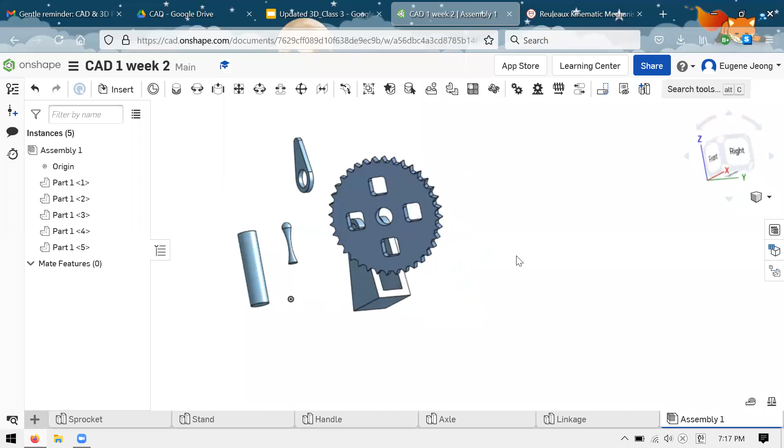First thing we do, same as we did two weeks ago when we first demonstrated assemblies, you'll observe that all of these parts are free to move. So I can click them and drag them. They're not constrained to any part of the assembly, right? It's like I just dumped a bag full of parts onto the ground.

The first thing I want to do is, since the assembly has an origin point, I want to make sure my full assembly is sensibly located with respect to this origin. That's just because maybe I'll use this assembly somewhere else, like in a subassembly or as a subassembly for another assembly. When I import that, this is kind of the center of the assembly. And likewise, when I import the file somewhere, depending on the file type, it might consider this to be the 0,0,0 point, and I don't want that to be over here while my entire model is somewhere else.

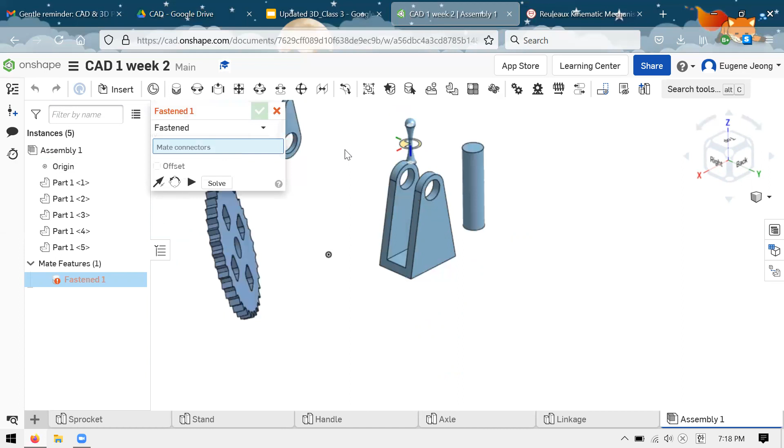So the first thing we want to do is fix the stand. Logically, it kind of makes sense for the stand to be fixed in the context of what this thing is. If you'll remember, we have our fasten mate for that, so see if you can do that the same way we did before: just take a corner of the stand and fasten it to the origin.

And you'll get another chance to work with our mate connectors. So something like that - you'll see there's my first mate. And in the tree on the left, my list of all my mates, you'll see that I have this fastened here.

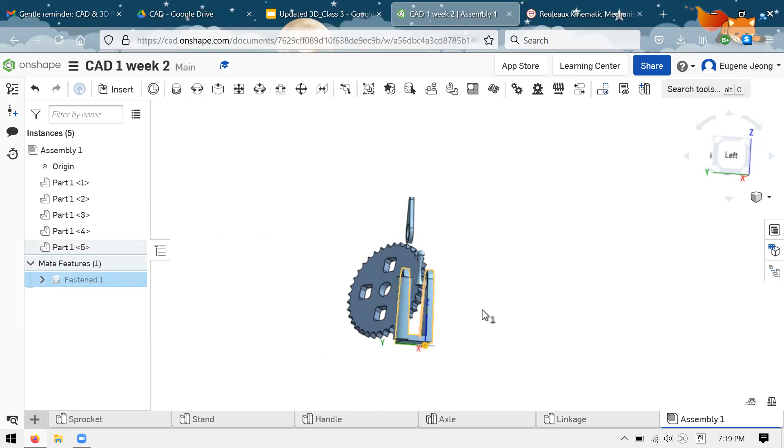I see a couple more people join since I started talking. I didn't really notice when you joined, but all we did so far is open up our assembly that we left off with last week and made our first move, which is to fasten the base so that it stays still.

As we go through this assembly, this is going to be our first sort of complicated assembly where we're going to have different types of mates. We're going to have a lot more mates than we did before when we were just fastening the bricks on top of each other.

In general, when you're working on a project, it's good practice to name your mates, just because, even more so than parts and features, it gets really confusing what mates are - like stand to ground.

If you didn't know that, you can actually name all the parts - everything in the feature tree, even in here, you're able to name. Especially when you work on group projects and are all working with the same CAD document, it's a good idea to name things in your feature tree, but don't worry too much about that if it takes too much time. It's just a point that I like to make.

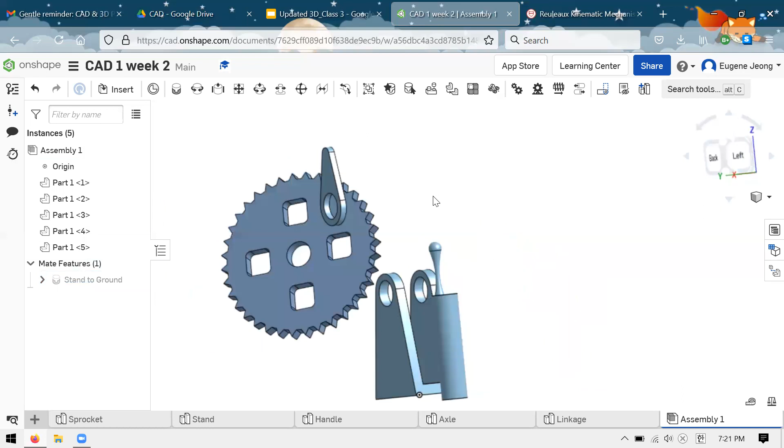So while I'm rambling, hopefully you caught up with that whenever you joined.

Next thing we want to do is just like assembling this if we had the parts with us in real life. Let's say the next thing I want to do is attach this axle to the sprocket. So what I do is put it into the hole - I want it to be symmetrical so that the axle is centered on the sprocket, and realistically I want them to be joined together.

As if I were taking glue and applying the glue to the axle just so that it would rotate with the sprocket. In real life I probably wouldn't use glue because that's not a good way to transfer torque, but you can see in the demonstration model there's a keyway, which I brought up last week. We're just mimicking the function of that keyway, which is to lock things rotationally. Since I'm using the word lock and glue to suggest that, we're going to use a fasten mate.

This is a bit different from what we've done before, since we want this to be symmetrical instead of a point-to-point kind of mate. You'll notice Onshape has these default mate connectors. When I hover over my shaft, you'll see by default there are 3 mate connectors: one on top, one on the bottom, and one in the middle. That's great, I want one in the middle because I want this to be symmetric.

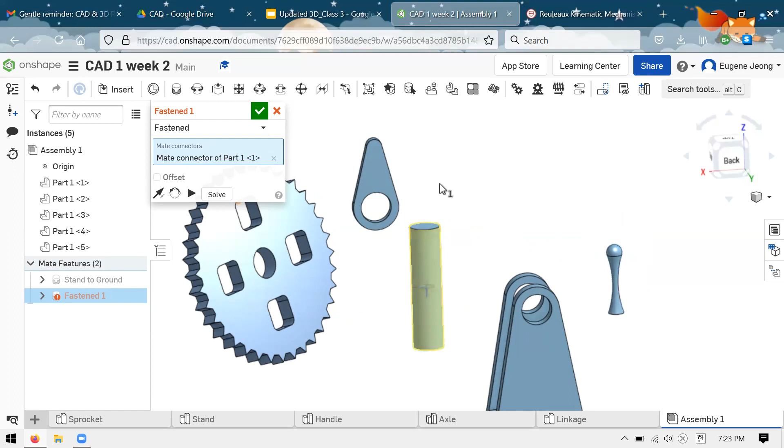That's what you would do, but in my case the middle is good. So there's my first mate connector. As you know, for the fasten you need 2 mate connectors. The second one is in this sprocket, and I want it to be in the middle as well, so this thing ends up symmetric.

So what I'll do is align my camera so I can look into this bore in the sprocket, this hole. If you look really closely, this one also has 3 mate connectors: one on the front side, one on the opposing back side, and one in the middle. It might be hard to tell three-dimensionally, but as I move my mouse here, this mate connector is located on the plane that bisects the sprocket.

So I click on that. Onshape solves it, and you'll see that now it moves to where I want it to be. So that's a fastening complete. You can see when I move one, the other one moves with it—they're functionally just bonded together now.

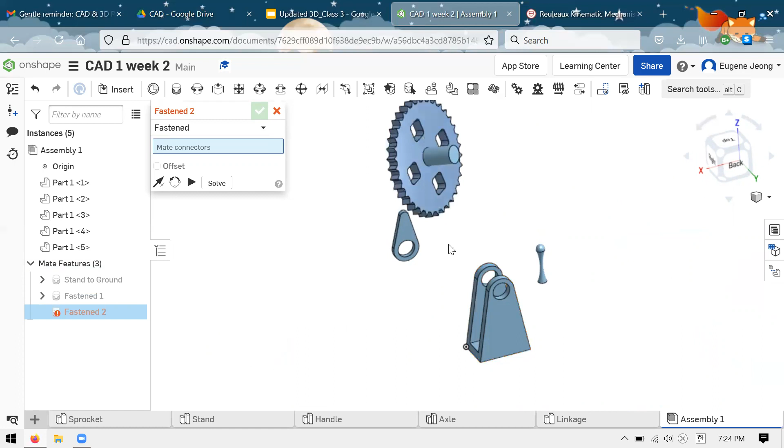If you had any problem with that, ask a question. If not, I'll assume everyone's good.

So now there's kind of 2 ways we could go. We can either put this thing that we just made into the stand, or we could also put the handle on. Maybe for me, I'd like to put this on the stand—that seems pretty interesting.

So how do we want these things to behave with respect to each other? Well, we don't exactly want to fasten them anymore, because if we did that it would be kind of like we're gluing them together. There would be no motion possible if we fasten them, and that's not really the intent. That's not the design intent, where we want that handle to be able to rotate the sprocket. So we're going to have to use a different kind of mate.

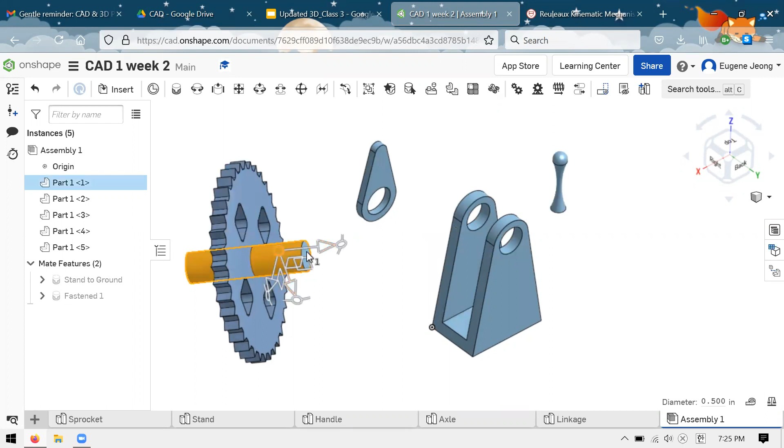I see you have your hand raised, you have a question? I was just thinking about it—which one is the axle again? This is the axle, I've also called it the shaft. Which one's the linkage then? That'd be this one. Doesn't the linkage have 2 holes inside, or does it have 1?

It doesn't really matter. As I've said a couple times, this isn't really realistic. This isn't like the way you would make this if you were woodworking or metalworking, but just for the purposes of our CAD it'll work either way. If you had no holes it would still work, just because we have our mates, which are these ideal geometric relationships. So it doesn't really matter—it's up to you whether or not you have the holes. Should work whether you have 2, 1, or none.

All right, so next thing we want to do, I guess next thing I will introduce is the second mate. You'll see that it is actually the second one in the toolbar.

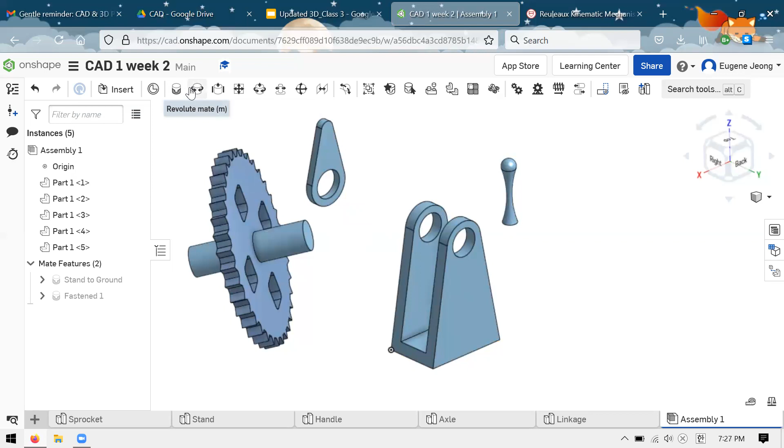We've used fasten, now it's revolute. Let's see what it does. We click on it, brings up the same tool, and you'll see it still asks for mate connectors. It's pretty much the same thing that we've done, just that it will end up behaving a bit differently.

So what's my intent here? I kind of want to put this axle, the shaft, inside of these 2 holes, the bearings. And I want it to be symmetric again. So for my first mate connector, I want it to be kind of in the same place that I just put it.

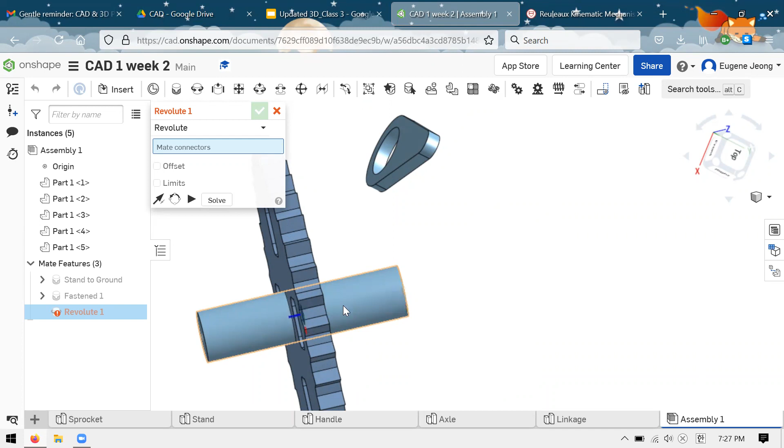It'll be kind of hard to see now that the sprocket's in the way, but what you can do is hover your mouse over this piece. If you just move your mouse a bit, you'll see the mate connector moves as you come closer to one or the other. So you should just be able to select one like that. You can see that's where my mate connector is right there.

And for the second one, you can imagine where I would want my mate connector to be is right in the middle here, between this hole and this hole. But you can see Onshape doesn't like intuit that, right? It doesn't know what I want.

So what I can do is create a mate connector using the mate connector tool. There's a few ways I can approach it. I'll show you one of them.

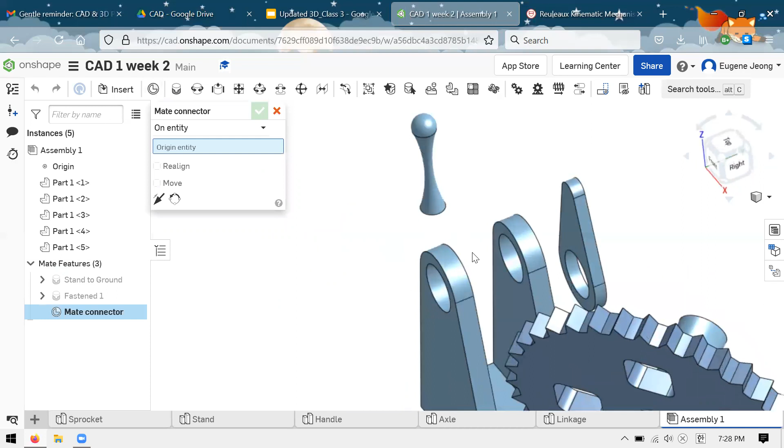So how are we going to do this? We have our mate connector tool. That's the one right over here. And it allows you to just create a mate connector.

So the way this works, it's kind of like selecting a mate connector for a mate, but you see if I click kind of generally where I want it to be, you can see where the mate connector is.

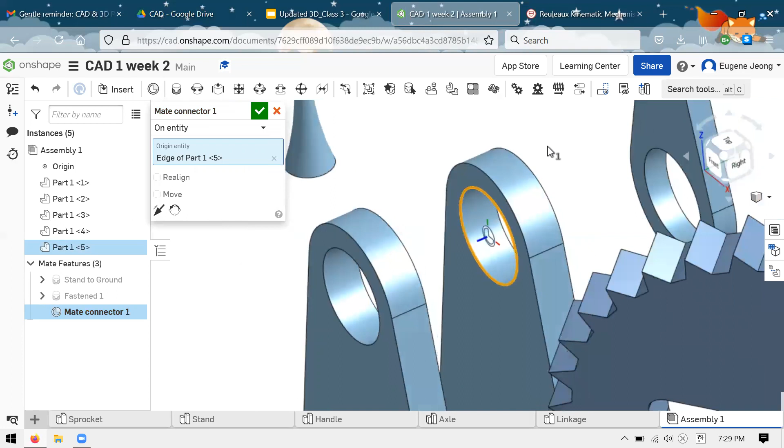And so you can see this where the mate connector is. This is almost where I want it, but not quite. It's on the right axis in terms of the cylinder, but it's not in the right location along that axis. And what I can do is just tell it to move.

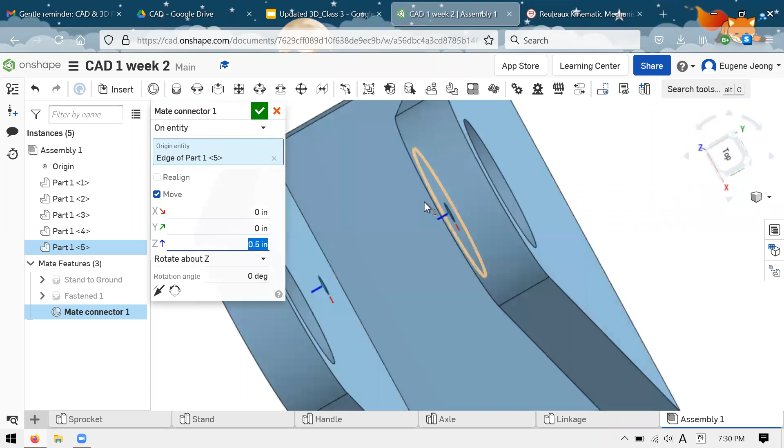In this case, perhaps I would need to know the distance between these two. I think from memory, it might have been like an inch or something. But you can see what happens. I guess it was not an inch, but must have been 3/8 of an inch.

So you can see that's one way I can do this, right? I created my mate connector. Don't worry if you missed that, I'll be coming back to it, but I have this mate connector now that I can use for another mate, where I can now select this as one of my mate connectors.

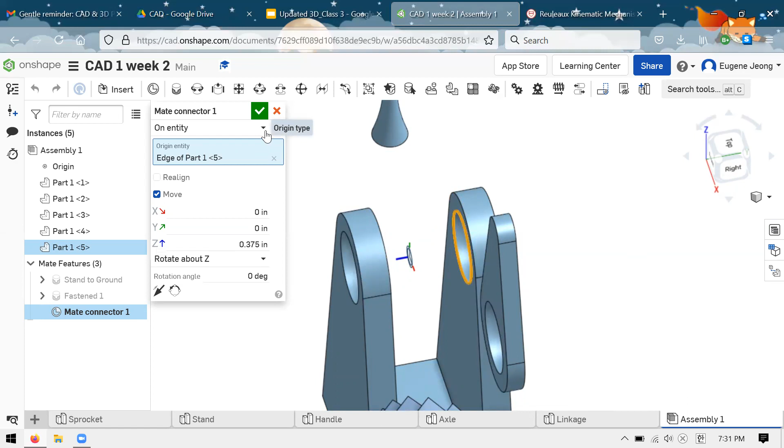You might think, oh, what you just did, that wasn't very robust, right? If I change the stand, it's not going to change together. And you're right. If I update the size of my stand, the mate connector is still going to stay like 3/8 of an inch away from this face, which is not great.

And so you can see now I have another option. We have on entity by default, but if you click this little triangle, you have an option for between entities. Hopefully if this tool works the way I think it does, as always, we're doing this live. I select 2 faces.

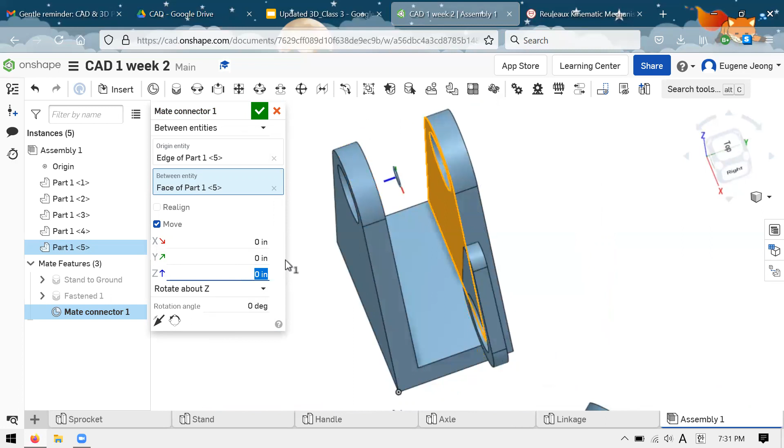Okay, let's try that again. And as you can see, this tool perhaps does not work the way that I expect it to work. And that's fine. That's how we learn things in CAD and in life.

So what we'll do is go back to the way that we had it before. I'll select that. I'll change back from between entities to on entities. If you're really curious about what between entities does, I'd recommend you look it up. Onshape has a pretty good documentation.

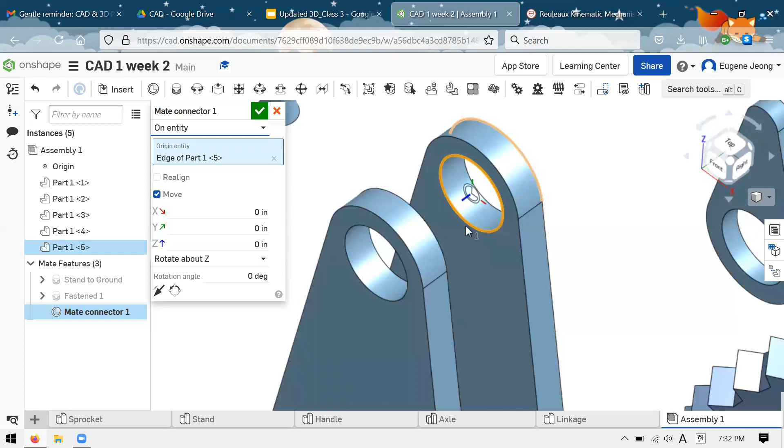Right, I'll pause for a moment there. That was kind of a bit of rambling, but hopefully you're able to follow that. I expect you might have some questions about creating this mate connector, but feel free to ask.

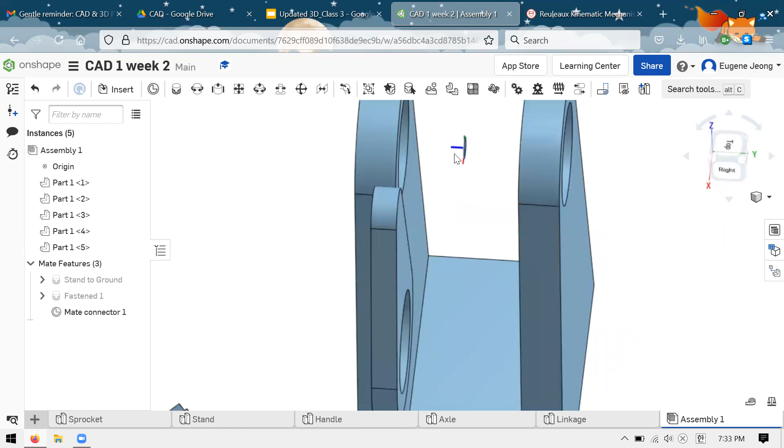All right, great, glad my explanation was clear. So that's how you create a mate connector. If you really want it to be robust, you can use what's called variables, which we cover in a later CAD class. There are ways to make it robust even if the tools don't work exactly the way you thought.

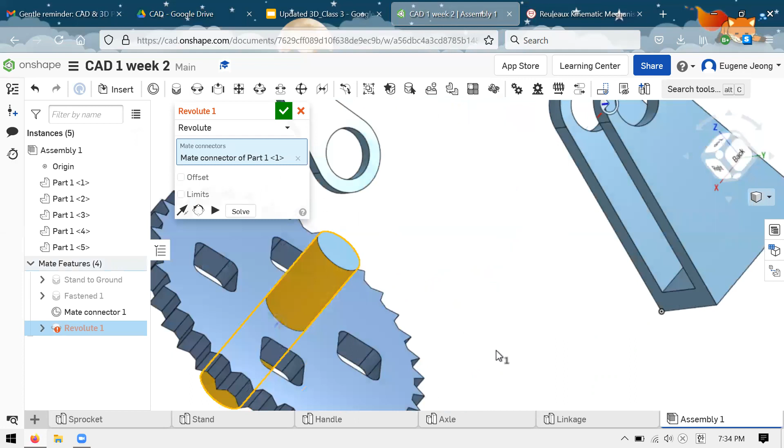So back to where we were trying to use the Revolute mate. Let's go back to that, open it up, tools active, windows open. Here it is. For my first mate connector, I want to hover over the axle and bring the mate connector down to the center. It can be a bit finicky, but with practice you should be able to get it.

The second one, just select the mate connector that we just added manually. If all goes well, it'll solve, or it might not solve, but it'll move over to where it should be. You'll notice the sprocket didn't come with it—that's just because Onshape hasn't solved it yet. It hasn't gone through every interaction to figure out where everything should render; it just moved the most immediate entities involved. If I click solve here, Onshape goes back and checks all the interactions. It sees the sprocket should be fastened to the shaft, so it moves the sprocket too.

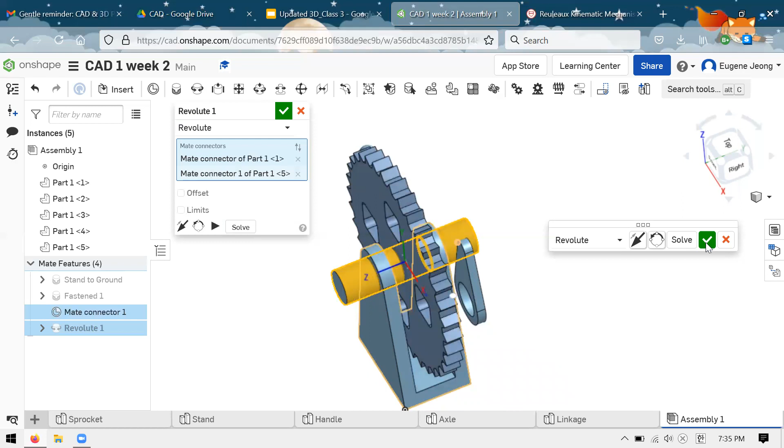So now we're good, right? Looks pretty good to me. I'll click the check mark. And that seems to be what I wanted it to do. So that step is finished. It's probably one of the more challenging steps in this whole process, so if you have any problems with that, speak up.

You can also hide the mate connector once I'm done with it, just like I could for sketches and parts. Is anyone not able to get to this step?

Wait, when I moved it, it only moved the axle—it didn't move the sprocket. If you're still in the window, like if you haven't accepted the mate yet, you might see a button that says solve. If so, click that button and hopefully it'll update. Even if you don't click solve, if you click the green check mark to finish the mate, it'll probably snap into place. And if you've accepted the mate and it looks like what I have now, and the sprocket doesn't move, that's probably an issue with your fastened mate.

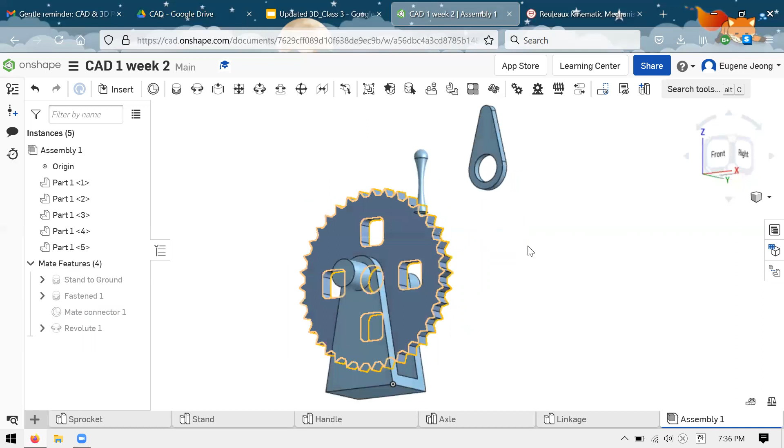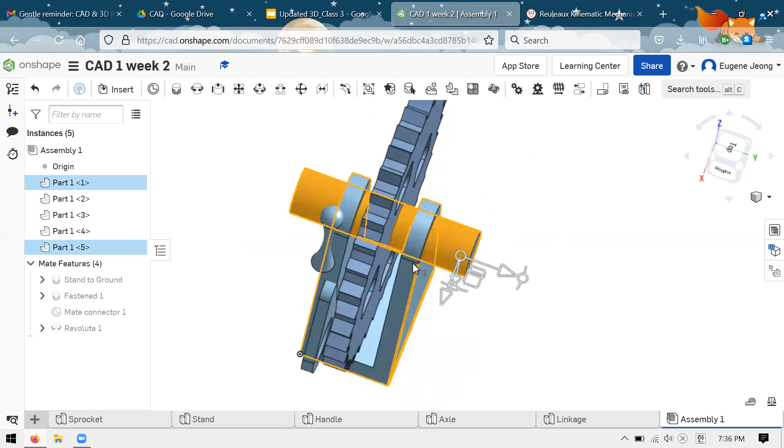Excuse me, yes, but how did you manage that—the tube in between, whatever that thing is in the stand? With the axle—how did you get the tube to go between these two, this and this? Yeah.

Unfortunately there's not a rollback bar, so I can't just go back. But the mate that's involved there is the Revolute mate we just did. I'll show that again since it seems more than one person is on that step. This is the new mate we're introducing—it's called Revolute, the second one in the list right after Fasten. And so we're able to create the mate connector—this thing right here.

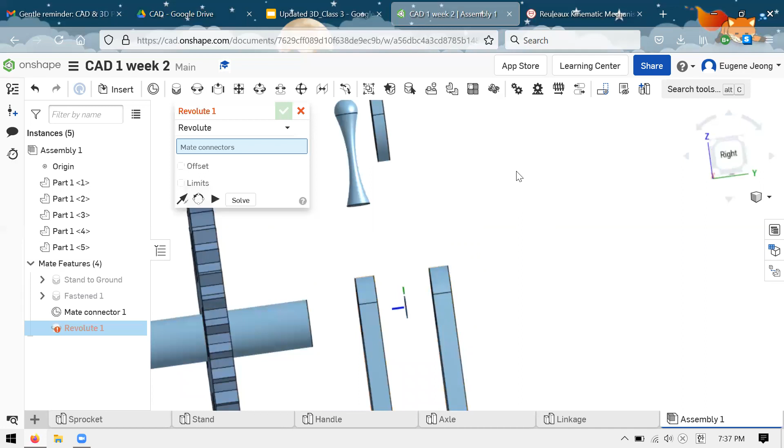I'll take your silence as agreement. I really can't talk that much because my throat hurts a little. I didn't understand what you said. I can't talk much because my throat hurts whenever I talk. Oh, that sucks. Okay.

Let's move on. I'm not sure what the situation is, but if you have the mate connector for the Revolute—yeah, I accidentally deleted it, so I'm just watching. Sorry, I'm not making out all of it. No, I'm just watching because I forgot where I put the slide, so I can't find it.

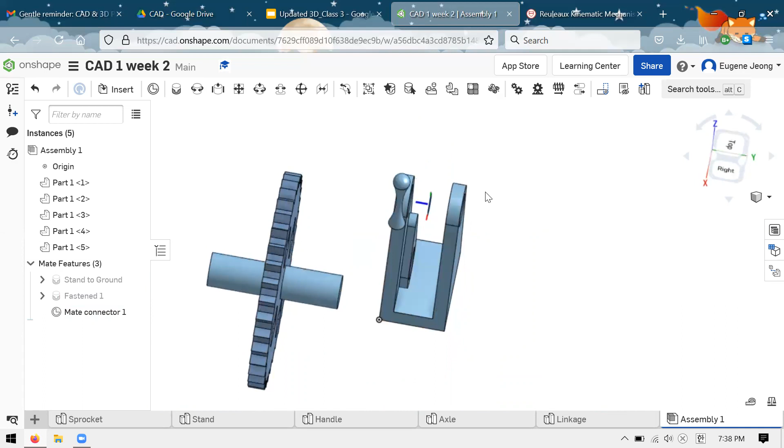In terms of the slides, I don't think they're posted on the classroom, but I take it you're just watching the class, which is fine, I guess. I think the student on the call is doing that too, so it's up to you. But if you have any questions, feel free to keep asking.

For now, I'll just slowly demonstrate the Revolute again. I select the first mate connector in the center of the axle here, and for the second one, I just select this mate connector that I created manually.

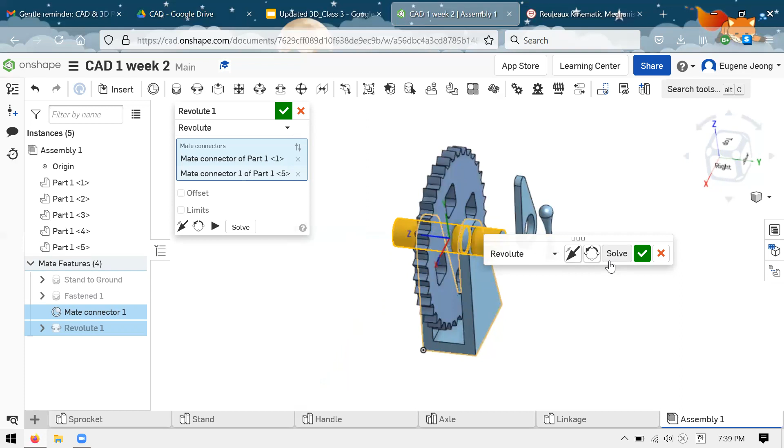One thing you might observe is when you first click on a mate, only the axle moves. This is just a visual thing. Onshape doesn't take the time to check every single mate and update it visually whenever you first create the mate. If you want to see what happens, you can click solve and Onshape will update everything. But even if you don't click solve, if you click the green check mark, it will update.

If not, I hope they will ask again. You'll see what the revolute does, kind of as its name suggests. It allows revolution, rotation. I don't know if you can see it well through Zoom, but I am able to spin the sprocket inside of the stand just by clicking and dragging.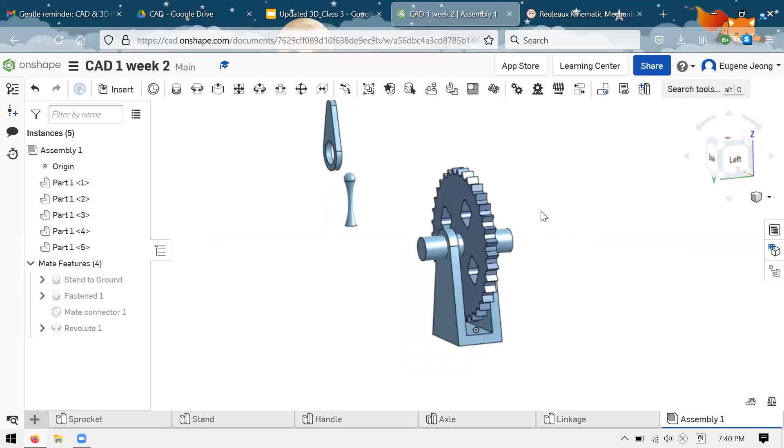Another way you can visualize what your mates are doing is using an animation. If you right click on a mate in this tree, you'll see one of the options, third from the bottom, is animate. This comes up with a whole bunch of options. The main thing in this case is I wanted to loop because it's circular, and the number of steps just determines how fast it goes.

So if I put in a number like that, you can see, hopefully with a slower rate, you can actually see it through Zoom.

If you're asking about the animation, I'm not sure, based on what you said of your situation, if you're on Onshape. I'm on Onshape. I'm just curious, how did you rotate this?

The rotation is enabled by the revolute mate. Up till now we've been using the fasten mate, which I've talked about in terms of gluing things together, fastening them, locking them in place. The revolute mate is our second type of mate, and it's different in that it allows 1 degree of freedom. All of these mates determine how our different parts are located with respect to each other and how they're allowed to move relative to each other. The fasten mate tells you the location of 2 parts with respect to each other, and it just locks those in place.

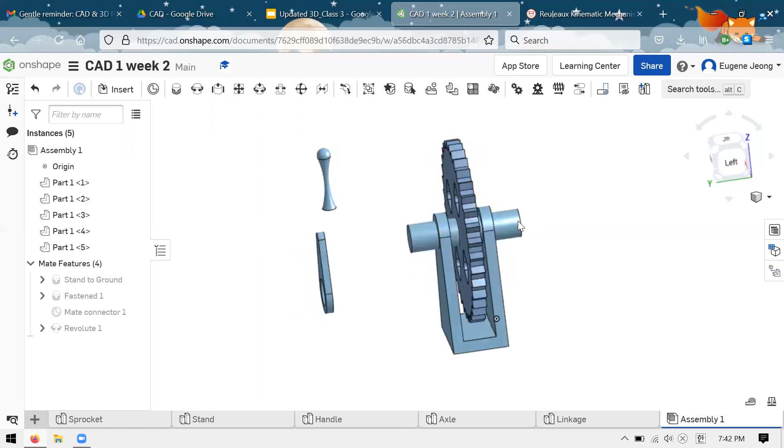Well, revolute also determines the motion of the parts relative to each other. So when I revolute this axle to the stand, I'm telling it that in the direction of my mate connector, which is along this y-axis in the full assembly's context, it has a degree of freedom there. So it's allowed to move, which means it can rotate. That's what the revolute mate does. You can see in the icon it sort of tries to explain what it does by having these arrows. For a cylindrical component, the revolute mate locks it into a position, but it doesn't fix its angle, so it can still freely rotate. This is very useful for things like modeling wheels, modeling gears, anything that spins.

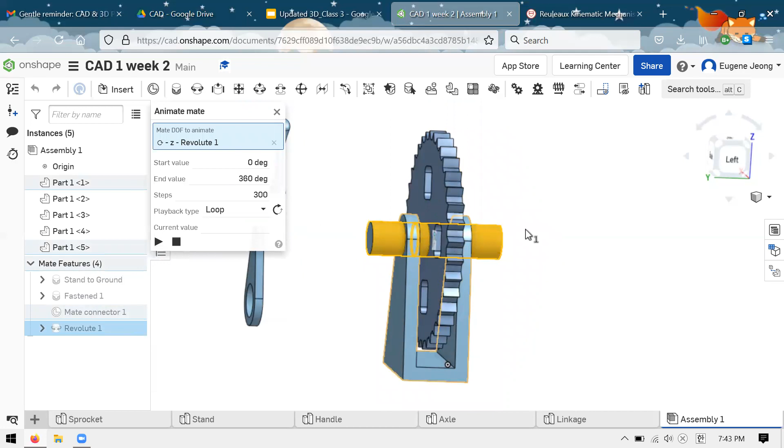Now specifically for the animation, the way I did that was right clicking, and if I click animate in that window, it brings up a bunch of options. All I did was change that to loop. If I play it, all it does is show every single position that this mate allows. The mate allows rotation, which is 360 degrees, and it just goes through every position that this mate allows with its 1 degree of freedom. You can even see the current value of the mate in degrees right here: 212, 230, 250, 260, and so on.

So to all students, I hope it works. I hope you don't have any problems making the mates, but if you do, just know that mates are often a very finicky part of CAD. They don't always work the way you expect them to. They often break for unexplainable reasons, but all you can do is persevere. So are there any other questions up to this point?

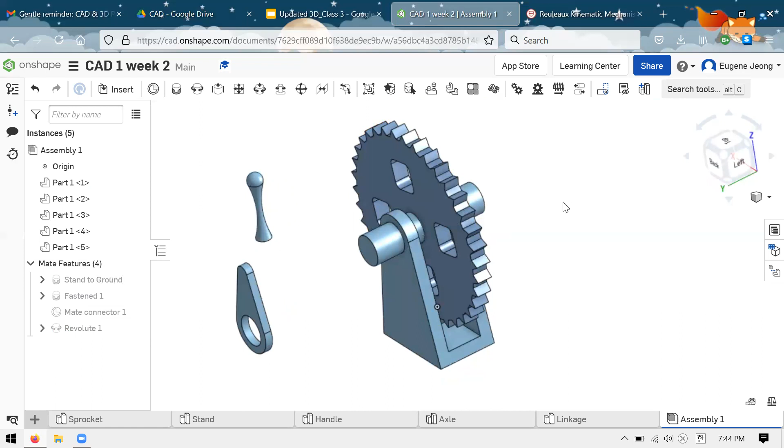So how did you do the animate thing? In the mate tree here, in the list of mates we have, the mate that allows motion right now is revolute. And if I right click on that mate, this window comes up, and towards the bottom here, there's an option called animate. So if you click that...

By default, it'll be on reciprocate, just to show you what that does. It's kind of like a reciprocating motion. It'll complete one full circle, then go backwards, then forwards, then backwards. The way you can speed it up is just reduce the number of steps, so this will make it 3 times faster, just showing fewer steps. It's essentially just a speed up. You can see what the reciprocate does, it just flips back and forth.

There's also single, which will just do it once. In this case, what makes most sense is probably loop, just because we do want it to keep going in the same direction.

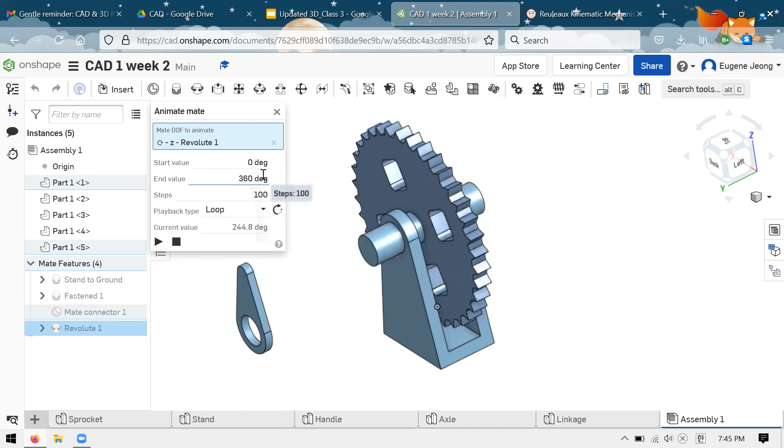So that's that. Animation isn't too important unless you're doing like a concept demonstration. Maybe you're a designer and you want to show off what you have, make some renders. In that case, you'll probably be doing some kind of motion study where you'll be animating multiple mates at the same time.

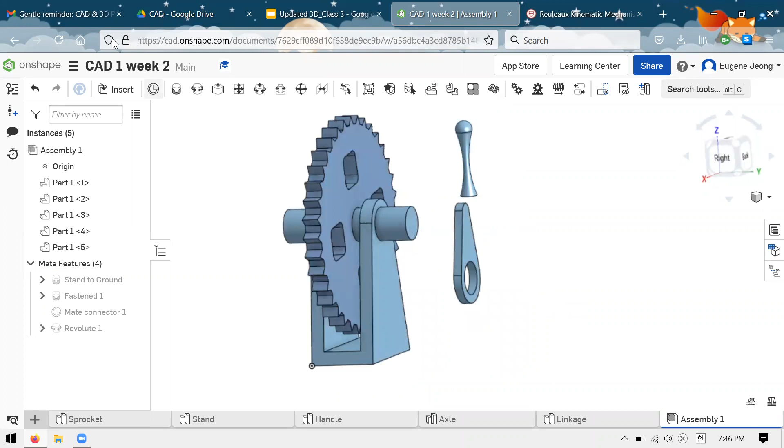So here we are, we're almost done. We just have these 2 parts left that we haven't used. First, we have our linkage here, which, as someone pointed out, it's really up to you how you make this. It could actually just be a rectangle, and that's totally fine, since we know how to use mate connectors now to allow us to do what we need. So let's start off by thinking about how these 2 things should attach.

And this is another place where perhaps in real life we wouldn't design things this way, but since it's CAD, we can kind of get away with it. Since this is a crank handle, we want to make sure the sprocket moves along with the handle. So relative to each other, the handle and the sprocket shouldn't be moving, and that means we want them to be fastened.

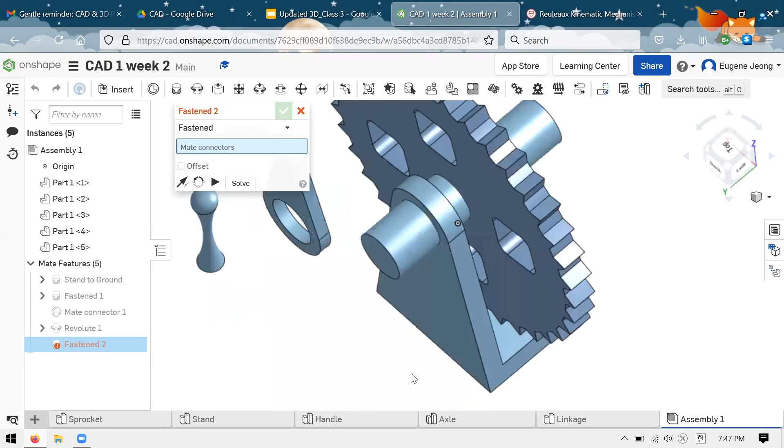So we're doing it again. See if you can figure out how to set the mate connectors up yourself. In this case, you don't need to make a manual one, you can just use the ones that Onshape can intuit. For me, I think I'll just go with the one on the end here, and I'll pick the one on the end here.

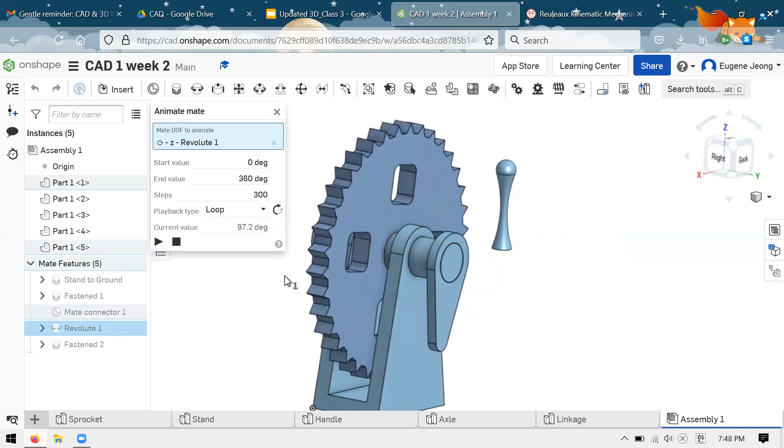What happens is the circles get locked together. Click the check mark, you'll see now they're attached. What you can see is now it behaves the way I want it to, where I can turn the sprocket using the handle. And again, if I animate it... there you go. So I'll wait just a moment for you to make that fastened mate.

See if you can figure out how to do the handle too by yourself. It's pretty much the same concept now. We kind of want to glue the handle to the edge of the linkage, so we're going to use another fasten mate.

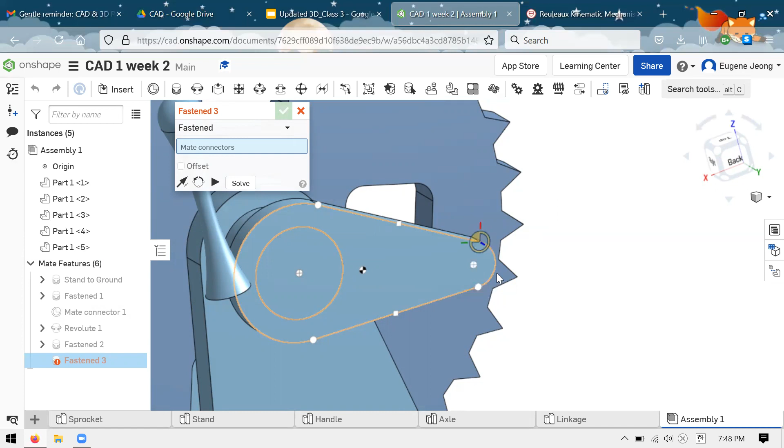And let's see in this case if Onshape is smart enough to guess where my mate connector should be. Spoiler, I guess Onshape can do it. And that's kind of because the way that I created this object, I made sure this is a circular arc. And so whenever there are circular arcs, like there is right here at the end, the center of that arc will be automatically kind of included in the likely mate connector points.

And so that's great for me, that's what I want. I'll select that as my first mate connector. And for the second one, I'll just pick the base of the handle, like so. And that looks good to me. I'll click the green check mark. And with that, I'm done with my assembly. That's all I really needed. That's all I have, the show's pretty much over.

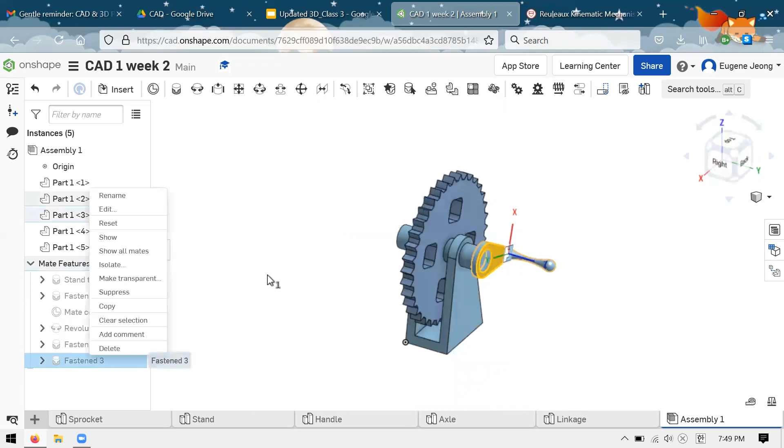I'll wait again just for questions if you have them. You can admire your handiwork. If you want, you can hide the origin and the other things. Wow, wow indeed.

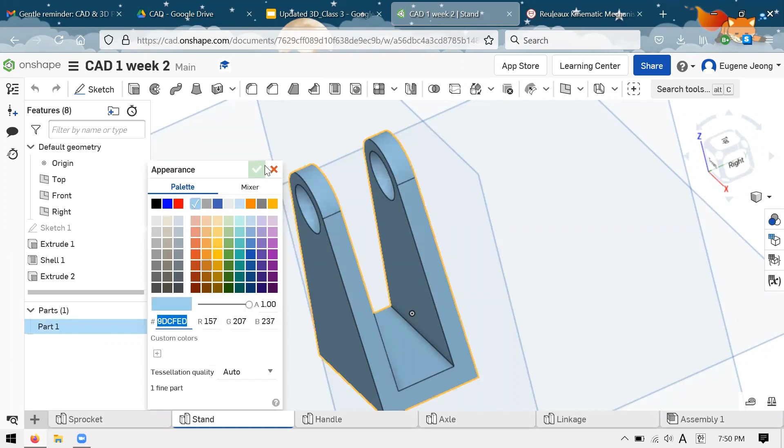If you're an aesthetic person, you can go back and change the colors of your parts too. I don't know, I'm not great with colors, but whatever floats your boat.

The way you change the color, you go back into the part. If you right click on the part here, you'll see the fourth option is edit appearance, and what you can do is just pick a color. It's mostly just for visualization, it doesn't change anything about the model. If I go back into the assembly, you'll see, hopefully it updates. Yeah, there you go, bright and colorful.

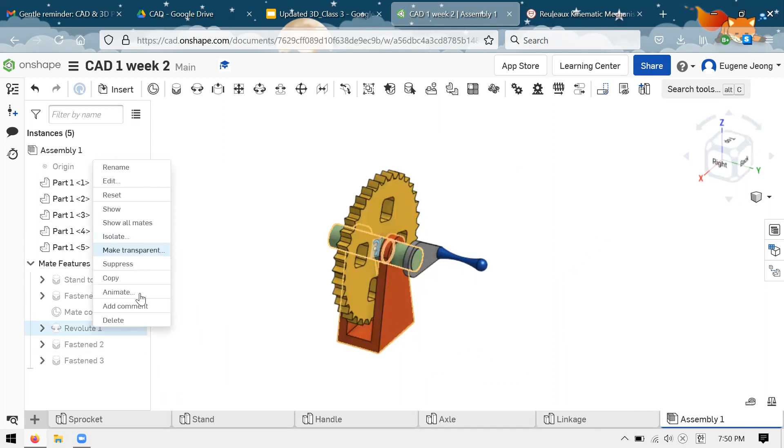So no one's asked me any questions, so I assume you're all at the same place, for those of you who are able to CAD currently, which is pretty good. First learning assembly is pretty challenging, I suppose. So you've made your first steps now.

And where do we go from here? So this whole process took... I see a question actually. Reminds me of McDonald's colors. That was not intentional, but I suppose like the red and yellow, I can see that.

So we've made one thing, and what is there to do but make another thing, right? Of the projects that this class has done in the past, just as a reminder, it's my first time teaching this class.

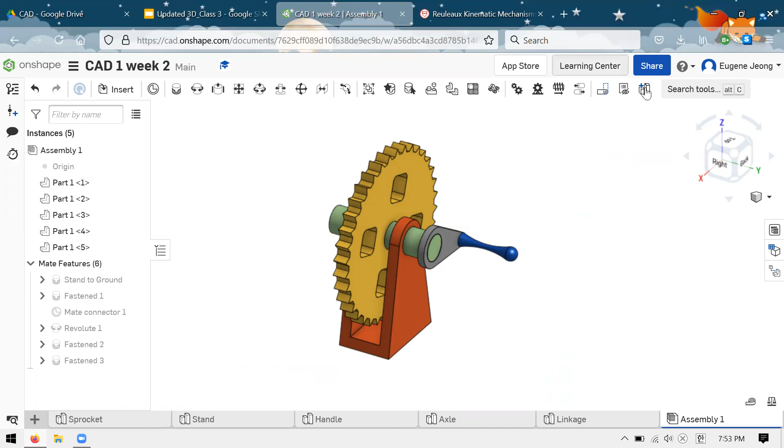So if you're motivated, if you want to learn, sure, go for it on your own time, or maybe on our time if you're very fast at doing the things that we do together.

But the next thing we're going to do is try to make this. So again, I'd recommend making a new document, new assembly, new document. I'll call it the do nothing machine, I suppose. And here we go, fresh start, new part studios, new assemblies.

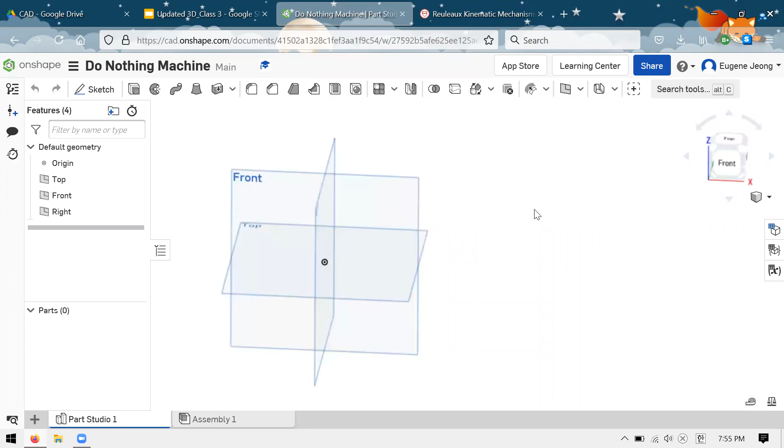I'll go into the same thing that we did last time, talking about what shapes do you see, how are you going to make this thing. But before I do, I just want to show you this website. I'll copy the link for you too. It's kind of a virtual library of Cornell's collection of kinematic machines.

So on your own time, if you're interested in this kind of thing, which I kind of am, you can go through and look at them. A lot of them have videos associated with them, which is cool. So this is kind of like a class of those machines, right? It's a very simple one linkage device.

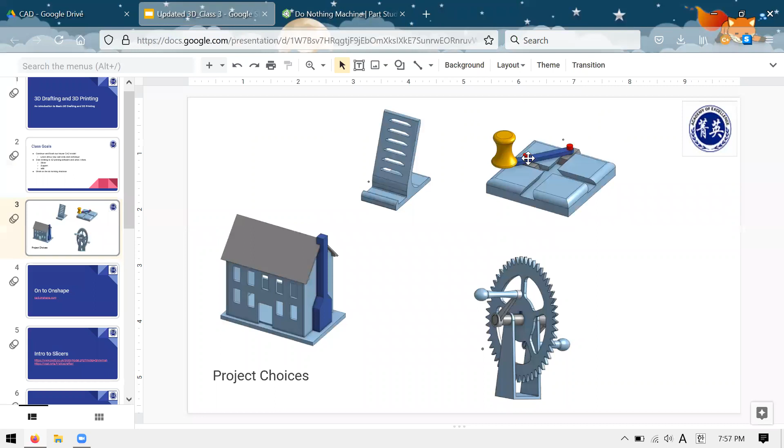So while we're here, I'll open the floor by saying, what shapes do you see? I'll bring it to the front so you can actually see it. There you go. What shapes do you see? Square. Where do you see a square? The base. Base. Sure, I buy it. What else?

Quadrants, so another square is on top. Yeah, okay. And you'll notice the edges aren't really flat or straight, so that might be something interesting. What about some of the other parts? What do we see, maybe in terms of features that you might use in Onshape?

Like the circles for the handle, yeah sure, like the 3-point one. Yeah, like the sketch tool where there's different ways to draw circles. That might come into play.

So like with that arc there too, yeah. And what about this groove? What shape is that? Sort of like a dovetail in woodworking. What's it called? Great question.

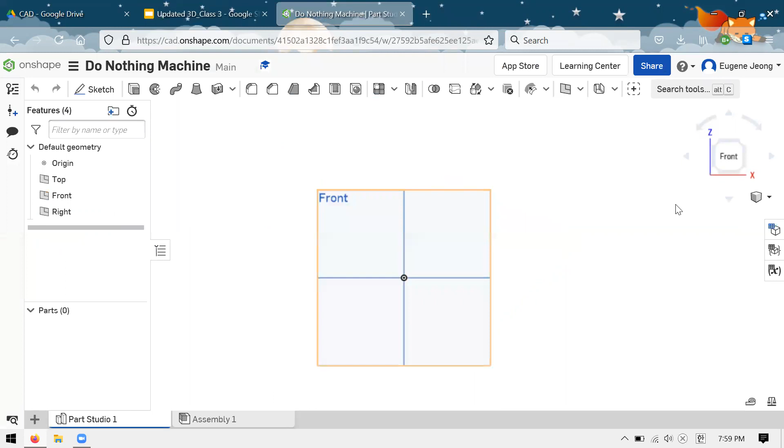What's this whole entire assembly called? Yeah, I don't know if this particular one has a name. It probably does, actually, I'm sure it does. I'll leave it as an exercise for you to find out because I do not have it on the top of my head. I think it's named after somebody, ancient Greeks or something of that nature.

So we'll start off just with our part studios. We identified all the parts we have. So there's a base here, there's these trapezoidal sliders, there's a link and there's a handle. So how many distinct parts? 1, 2, 3, 4.

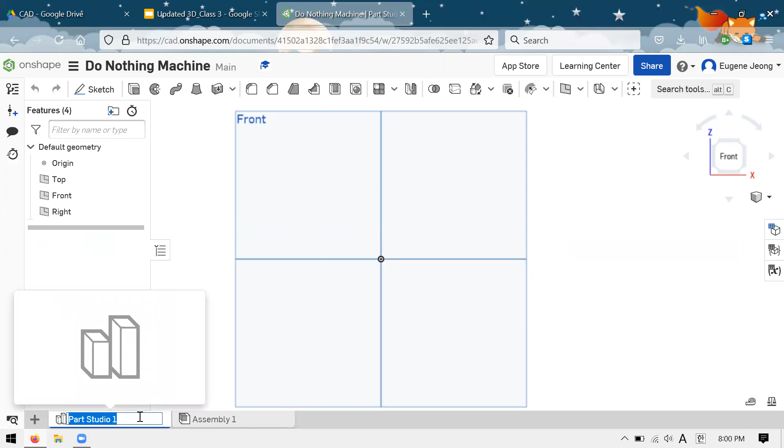So just go ahead and create those. We want a base, we want sliders, we want a linkage. And what was the last one? The handle. And our assembly, which is just there by default, so we'll get to that last.

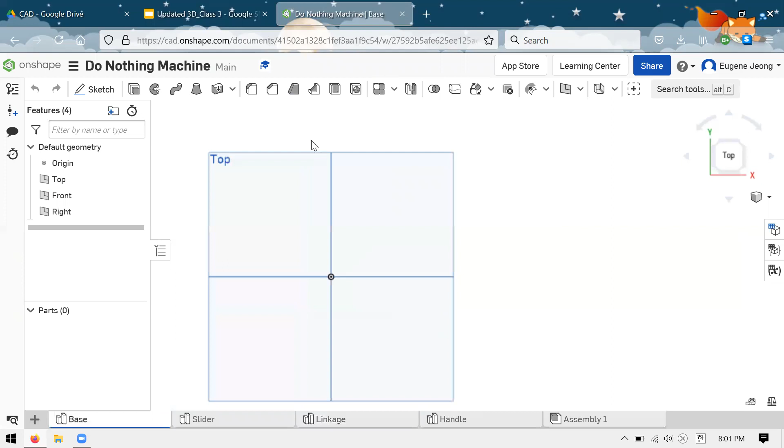So starting off, since we don't have that much time, how many classes do we have? I think this is week 6, so we do have just 2 weeks after this, so I think we'll finish. Shouldn't be too bad, I'll just get it started.

Someone said the base looks like a square, which I agree with. It's symmetric by 90 degrees. So let's start out with that.

We make a square with that corner rectangle tool. I suppose if you're someone who cares a lot about part and assembly origins, you can make the square centered, which in some cases might make more sense, but I'm not too worried about that right now. Next thing, condition for a square is that they have equal sides.

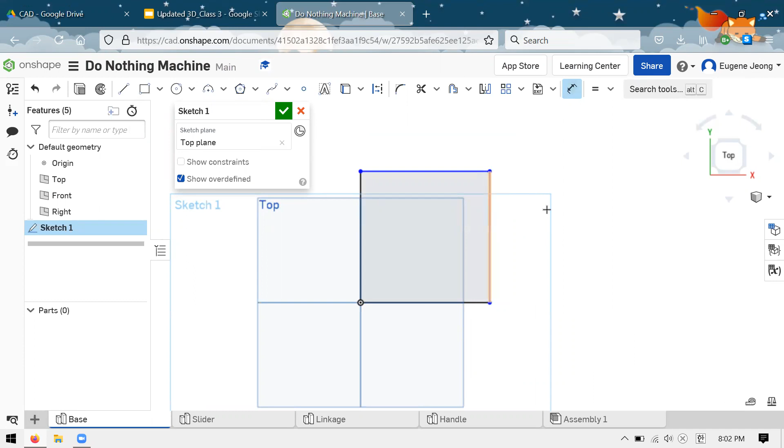So I can do that with a constraint. Last thing, why isn't this fully dimensioned yet? It's because there's no dimensions. So I'll just add one with the dimension tool. And this number will determine the size of this entire object. Let's say 2 inches.

It'll be miniature. So that's a square. The next thing we'll probably do is to extrude the square. It's been a classic move. So we've done most of the work now.

We just need to cut out these grooves, and we need to round out the edges here. So we'll do that. We're gonna have to make a sketch for the grooves, right?

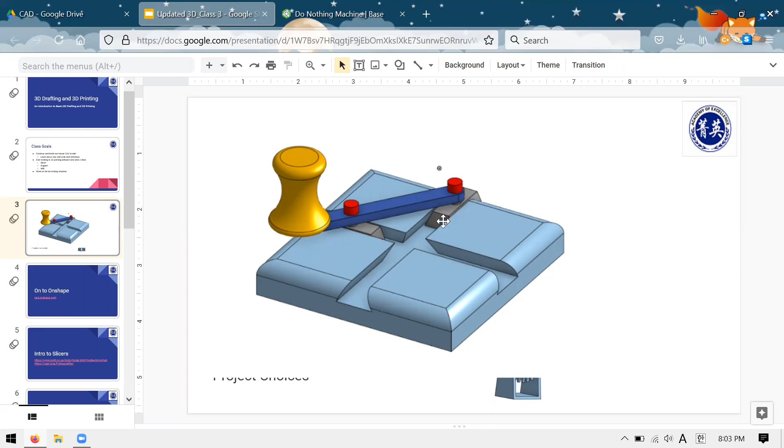And you can imagine the way we might go about doing these grooves, perhaps, is to cut out the shape of the trapezoid that will be sliding along it. So if we look in one of the orthogonal directions, maybe the front.

I can then sketch on the front plane. You can see the outline of my sketch there. And what I'll do is I'll draw the shape that I want, which is a trapezoid. I drew it up in the air, but that's just because I was trying to make a point that I can make a better way.

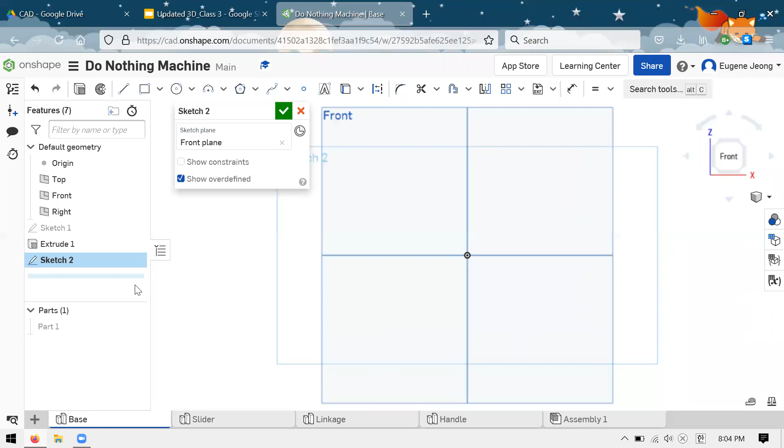So I made the sketch and right now there's nothing in it. If I hide the part that we already extruded, you'll see clearly there's nothing in the sketch, right? But I don't want to make this sketch from scratch. I kind of want to have it be in a logical place with respect to this block that I already have.

And so one way that I can incorporate this block is by just clicking on parts of it, right? So what I've done before is I've hovered over the geometry, and you'll note that when I do that, Onshape will create some constraints just based on this part itself, even though that's not actually in the sketch.

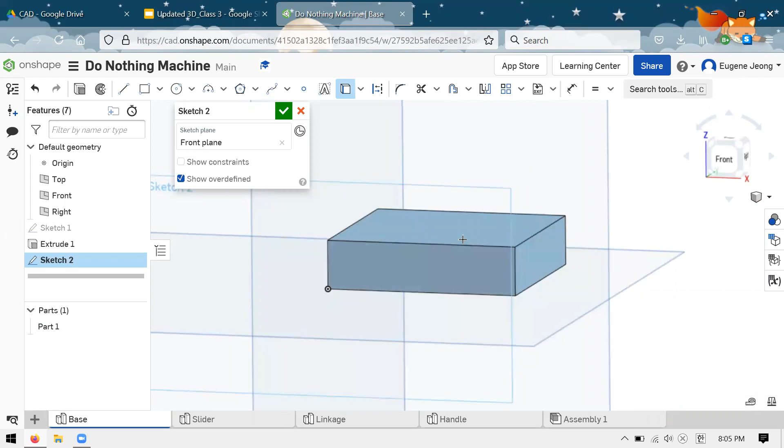So that's pretty useful. While we're here, I'll teach you a new tool, called project or use or convert. This allows you to bring anything that's not in the sketch, but still exists in your part studio, and bring it into your sketch as lines, arcs, splines and points.

To demonstrate what I mean, if I have this tool active and I click on this rectangle, you can see that it brings the rectangle into my sketch. So even if I hide the part now, that rectangle is still part of my sketch.

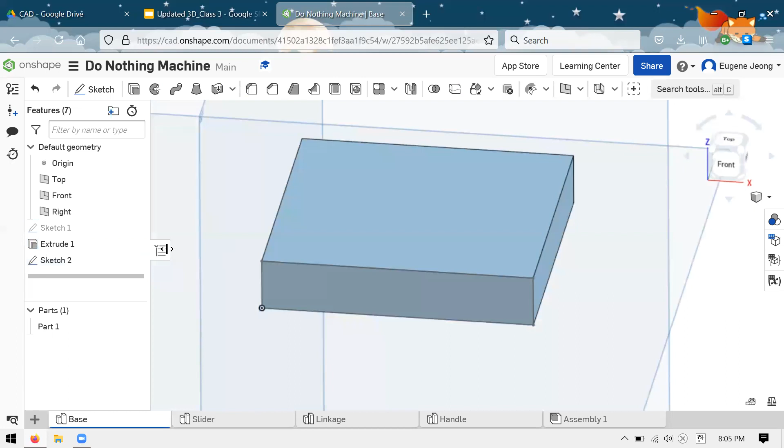So that's one way you can bring in references to other parts. And if I update the size of my extrusion, making it 3/8 of an inch, and go back to my sketch, you can see that the rectangle updated. That's pretty useful sometimes. Of course, I don't actually want the entire rectangle to be an actual thing.

So if I hit Q, as you might recall, that creates construction lines. I've done that, and now I have these lines that I can work with in my sketch. So I've done all of that. What else is there to do?

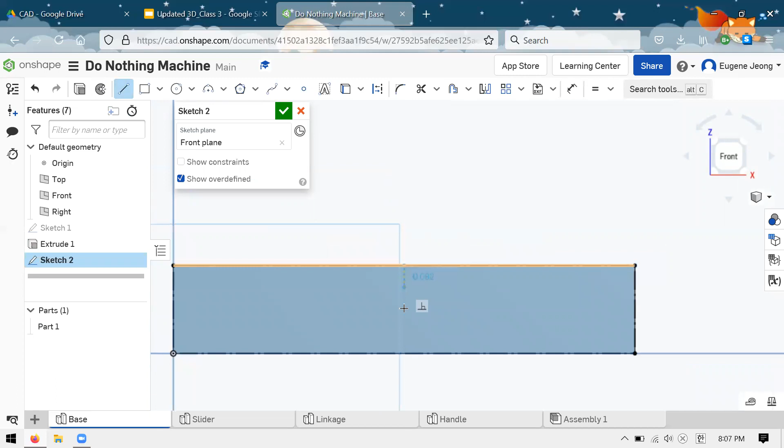I have to make my trapezoid. One thing I know about it is that I want it to be centered. So I'll use the snap constraints, where if I hover over the right place, you can see that little box come up, meaning midpoint. Since I want my trapezoid centered, that's a good place to put a line. I'll draw a line like that, make sure it's vertical, and it'll be black except for the bottom point. I'll make this also a construction line.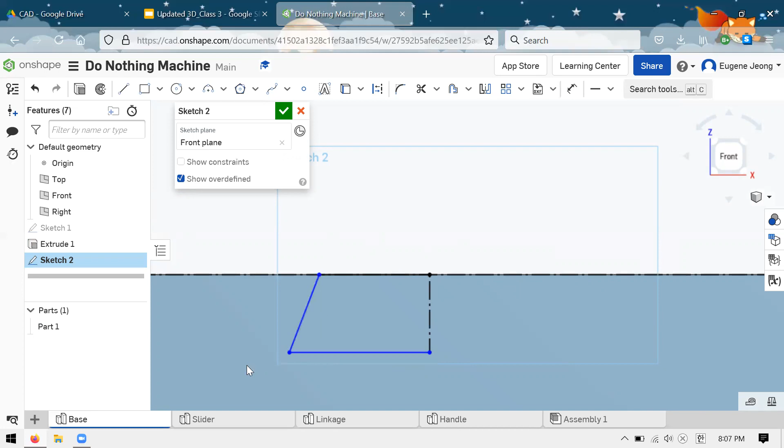Now I'm almost done. I just need to draw the actual trapezoid part. We'll start off with something like that. I'll make the base horizontal using the horizontal constraint. Last, I just need some dimensions, which can really be anything. How about 3/8? So there you go, that's half the trapezoid.

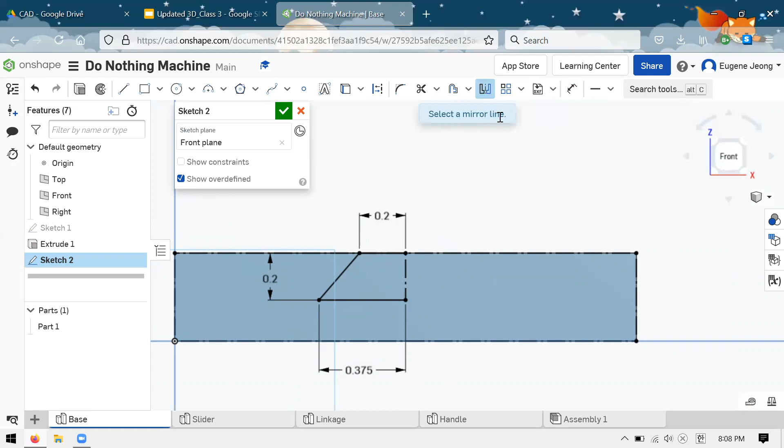For the other half, we'll use the mirror tool, which I forget if we covered in this class, but it's pretty straightforward, simpler than the feature pattern for sure. If you select the mirror tool, it asks you to select a mirror line - that's just where the mirror would be, like the line of symmetry in a real mirror. In my case, I'll just use that line. Once you click a line of mirror, it asks you to select entities to be mirrored.

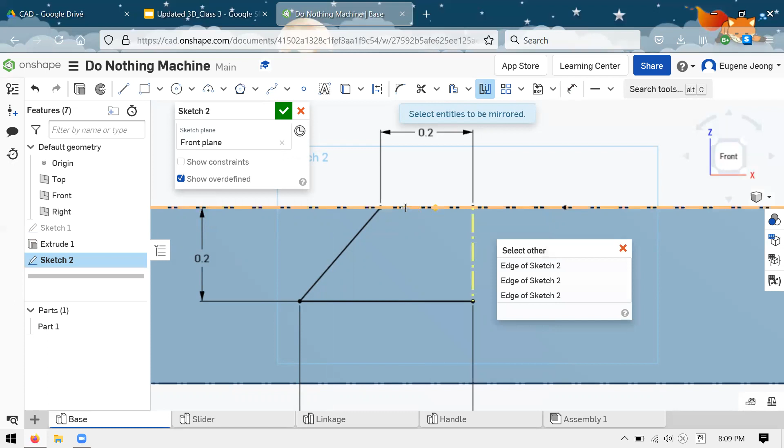In my case, unfortunately, I cannot select - there's a shorter line segment I'm trying to select, but I can't click it because of my construction lines in the way. One thing you can do is right click, select other. And so now it brings up this window. I'm not sure if that actually selected it, but I think it did because you can see it over here.

I'll do that again since it's a new tool. We have our mirror tool, select a mirror line. As you select entities to be mirrored, you'll see it automatically starts drawing them. There's that, and I want to select that line segment that's kind of hidden there. So just right click, select other, and this is the one I want. You can see it's highlighted, and if I click it, it finishes that off.

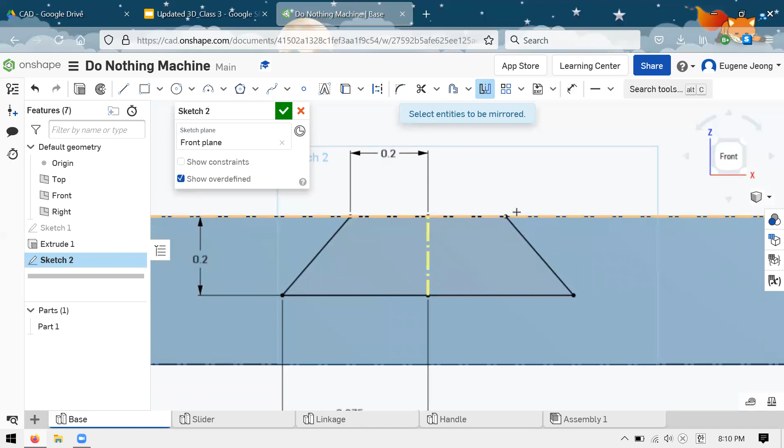And with that, I've sketched a trapezoid here, you can see it highlighted. The next thing I'll want to do is cut through the entire block in that shape. Hopefully this just works. I foresee that perhaps if Onshape does not like the fact that I'm extruding up to the edge, it might cause a problem, but we'll find out.

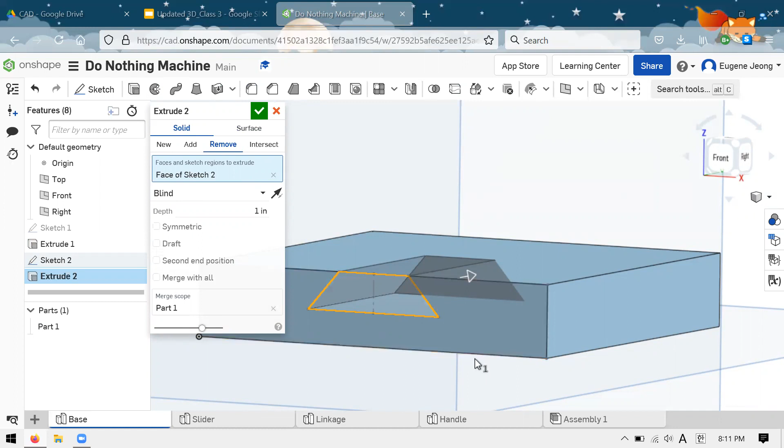So we bring up our extrusion, we change add to remove. What is the dimension of the bottom line? Doesn't matter, it's up to you - just make it look sort of reasonable. Just like with the sprocket machine, we're just making things up here. I'll change the extent to through all. Fortunately, Onshape can handle it - pretty good, I'd expect no less of a competent CAD package. And with that, I've created my first groove.

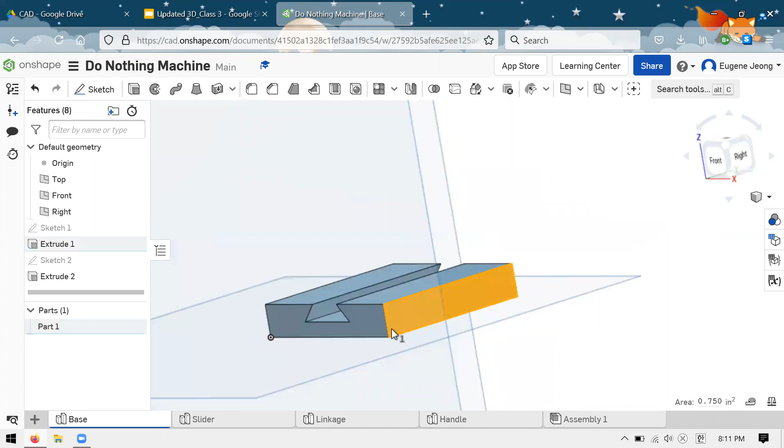If you have any questions, ask. If not, we're basically going to do the same thing on this side. All right, seems like no questions.

So we could do the same thing again where we draw a sketch, this time on the right plane, make the trapezoid, extrude cut it, and that's all fine. Another thing we could potentially do is use a circular pattern for a feature. I'm not sure if there's an easy way to select that axis, but we can also just draw another sketch and do it that way. So I'll leave it up to you in terms of how you want to do this.

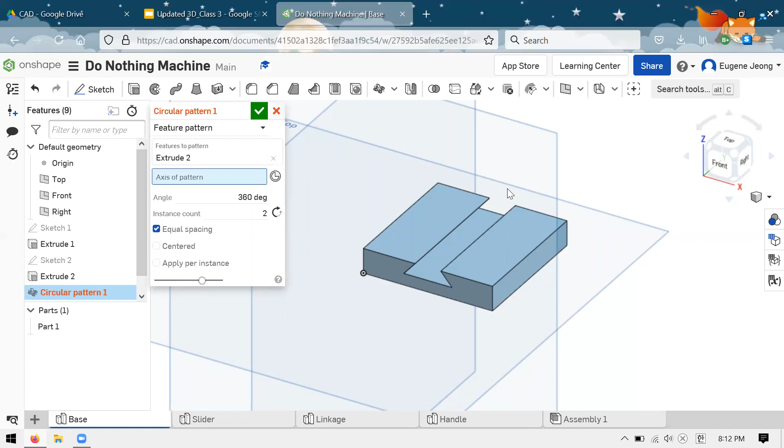Let me see. So there's no easy axis to snap to, but we can fix that just by doing another sketch. And because this might be slightly faster, I guess I'll do it that way. So I'll make another sketch, this time from the top. The objective here is just to create a center point for this circular pattern we're about to do.

I believe Onshape will accept a point in a plane as an axis for a circular pattern, though I'm not entirely sure. If not, it'll probably accept a circle.

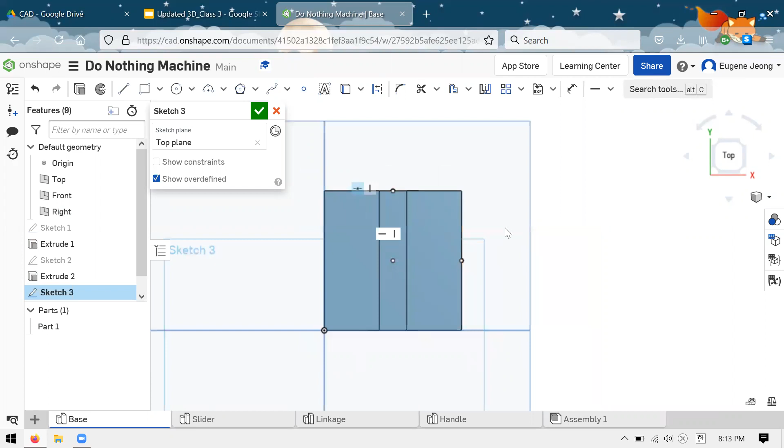What I did just there was very carefully allowing Onshape to guess the constraints that I wanted. So you can see by default, it's vertical to this line, this point, horizontal to this point, so it's all black. If you don't want to mess around with that, just dimension it normally, which I trust you were able to do.

So you can see now I created the sketch, I have this point, and hopefully it'll let me just circularly pattern my feature, this extrusion, about this point.

And it does not. So what I do now is go back to the sketch, maybe it'll take a circle as an axis. Again, as with all CAD, and you'll go through this whenever you learn a new CAD program, you never know what you can and can't do until you try it.

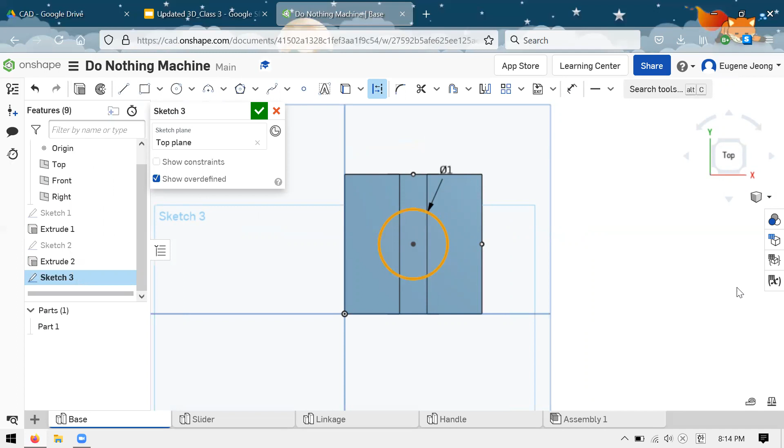So I'll make a circle just like that. Hopefully it works. If it doesn't, we'll just have to make another sketch on this side with the trapezoid and extrude it. But fingers crossed.

We want to feature pattern the extrusion about the circle, and it works. So pray for us. And with that, I've gotten what I want.

I see there's a chat message: cannot remove the trapezoid. I assume we talked about the extrude cut.

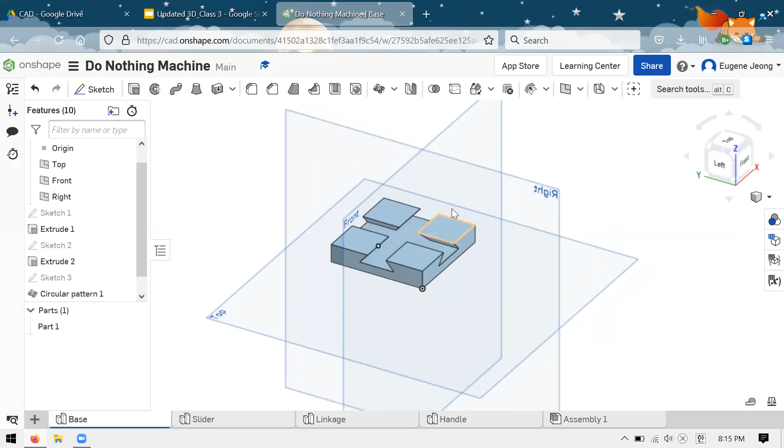Other than that, that's all I have for you. I'll stick around to answer questions for another moment or two. And the question I'll start with is the one that just came up, which is not being able to remove the trapezoid.

So you're on this step right here. And it says—actually, I'm not sure if it's on this step or on the last step. Which trapezoid can't you remove? Is it the first one or the second one? To whoever asked: the first, okay.

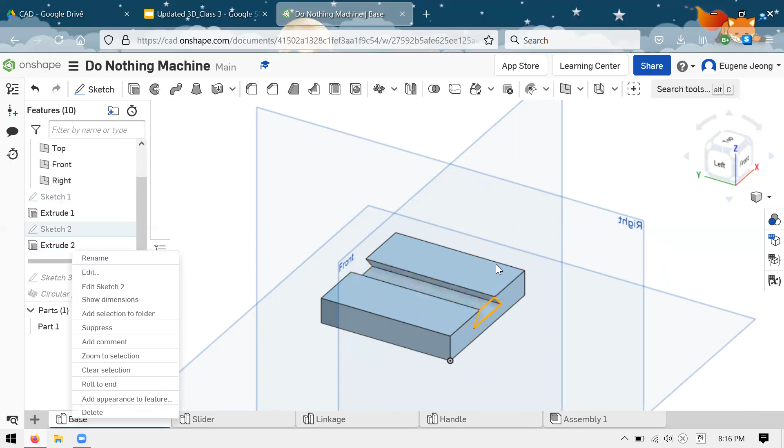Does it go part of the way? If it does, I'll go through it. Another possibility is that it's trying to extrude the other way, in which case the target and tool don't intersect because it's trying to cut thin air. The way to fix that is just to point it in the other direction. And if it's not that, okay, it is that, that's great.

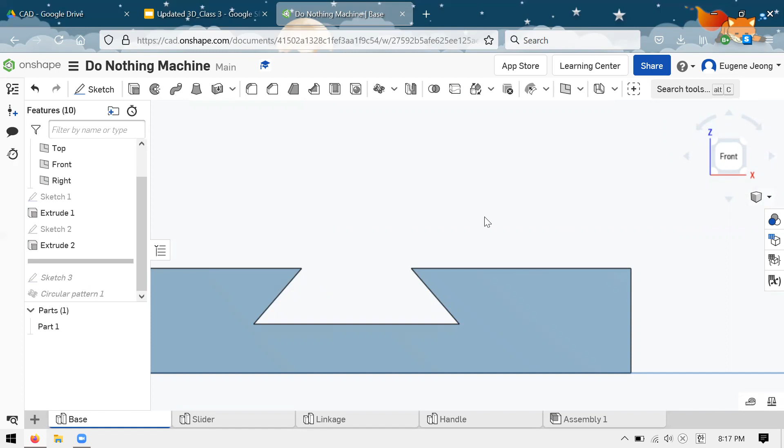If it's not that, it's probably an issue with the sketch where a lot of times with CAD, if you do things with the edge, sometimes it gets concerned about zero thickness or infinitely sharp intersections, or infinitely thin walls and such. If that happens, just extend the sketch a little bit so it cuts beyond, and that should fix things up. But in our case, it just works as it should. This isn't that weird of a thing to be doing.